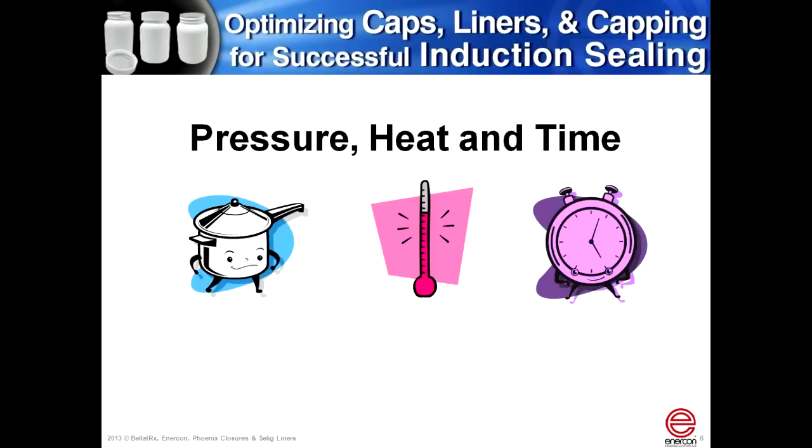First piece we're going to talk about is one of the critical components to understand, and that is the theory of pressure, heat, and time. Any sealing process that you undertake in your operation is going to require those three elements. So let's dive into each of them a bit deeper.

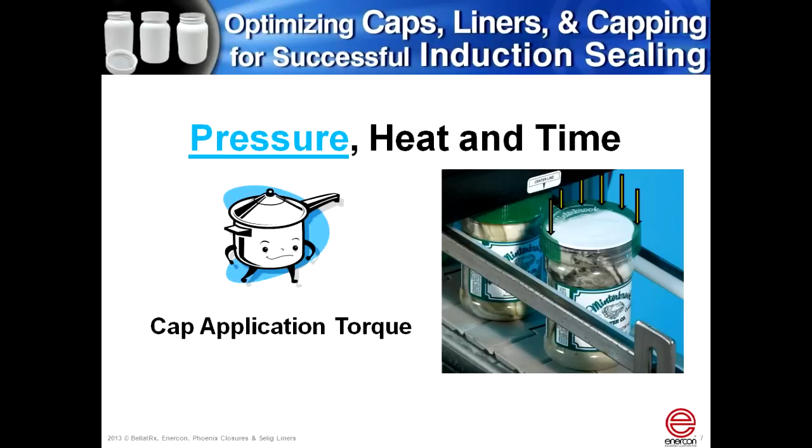Pressure in the induction cap sealing process is very critical. The pressure that is applied from the cap to the lining material, which puts it in intimate contact with the bottle, is provided by cap application torque. We're going to talk a lot about cap application torque throughout the webinar today, so keep this piece in mind as we go through.

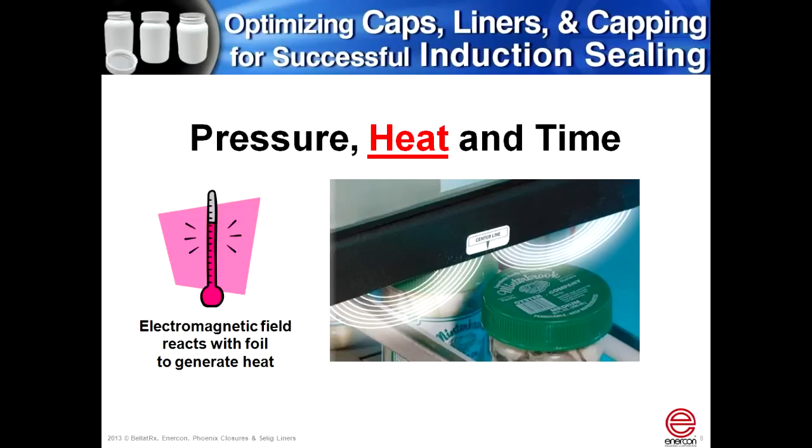The heat component in the induction sealing process is generated by the induction sealer itself. The picture on the screen here illustrates the magnetic field that's created by the induction sealer. You'll see the little white arcs coming from the center towards the sides of the sealing head in this picture. That indicates how that field generates throughout the width of the coil. This happens to be a case where it's going to be a wider application - a 63 millimeter closure - and the heat will vary based on the power level you set the machine at.

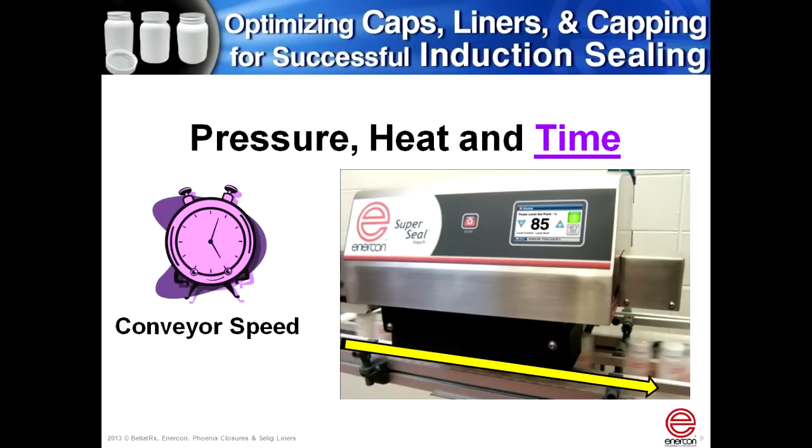The final component in pressure, heat, and time is obviously time. Time for this is not necessarily in minutes or seconds, but it is dictated by the conveyor speed, by the belt speed at which your product is running. So we'll take a look and say if you're running 50 feet per minute, we'll size the machine appropriately for 50 feet per minute, as well as knowing your cap diameter and the cap style involved.

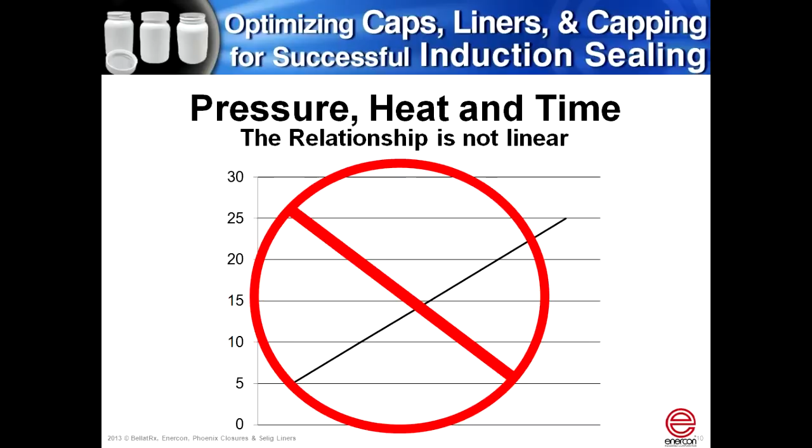As we talk about time, an important thing to remember is that the relationship between this pressure, heat, and time equation is not linear. If your product is running at, let's say, 100 feet per minute, and you decide to increase that by 10% to 110 feet per minute, you've got to keep in mind that the relationship between the power level needed on the machine is not necessarily linear. There are cases when it does happen, but it's always important to run and qualify your operating window, which Jeff from Enercon will get to a little bit later in the presentation.

So let's talk about a few variables in the induction sealing process, the first of which is air gap. When we talk about air gap, we're referring to the distance the foil is from the sealing head, or the top of the closure from the bottom of the sealing head. This is important to be consistent. The gap can be 1/8 of an inch, which is something we often recommend. Sometimes it's 1/4 of an inch, completely acceptable as well. It could be 1/2 an inch, but that probably isn't going to be overly effective. You're not going to use your machine as effectively. But the most important thing with your gap is that it's consistent.

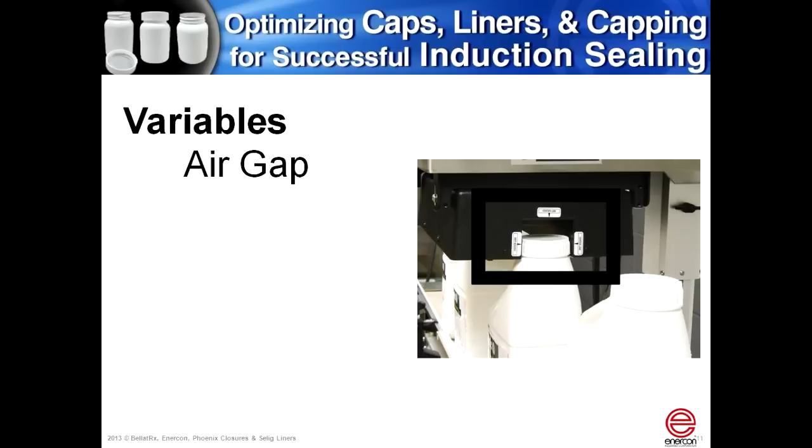We actually provide a tool with each of our systems. It's about an 18-inch ruler, 1/8 of an inch thick. You set 1 or 2 of them on top of a bottle on either end of the machine, simply lower the machine down, and that will set your air gap consistently each time. Jeff will dive into that a bit more later.

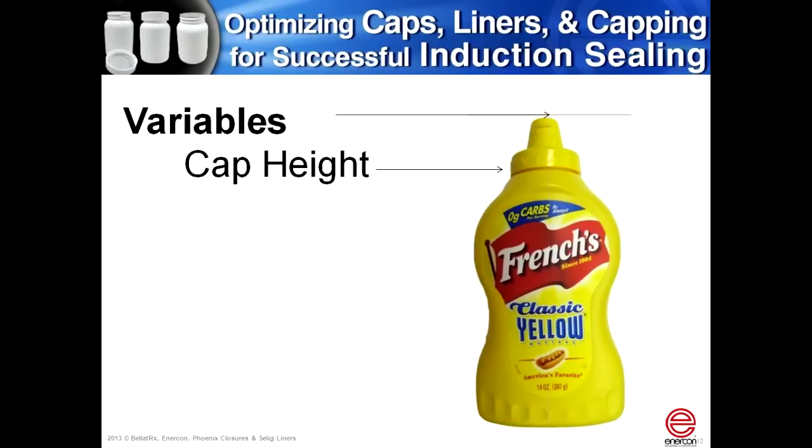I mentioned it in the pressure, heat, and time component, but application torque, I'm going to mention it again. We're going to dive into it deeper, but this is the most critical component to get right in your induction sealing process to ensure every time you're as consistent in your seal as you'd like to be.

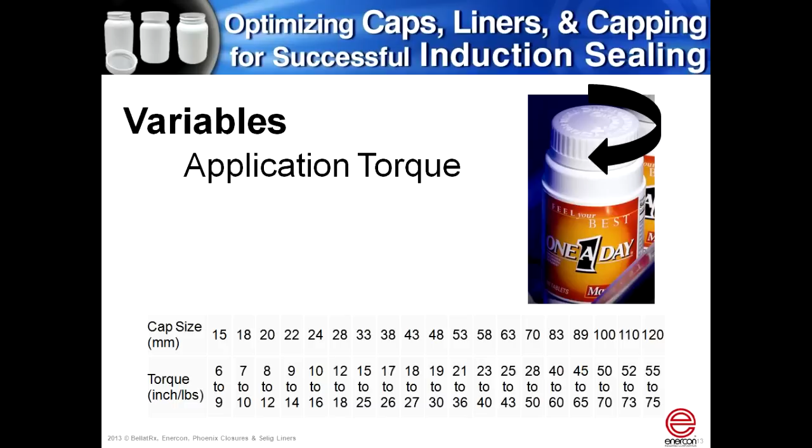The final variable that I want to talk about is material change. This can be anything from a wholesale material change, maybe that's your packaging, your bottle, going from an HDPE bottle to PET, or it could be simply changing from supplier A to supplier B. It's important to note any of those changes and make sure you run compatibility tests with the induction seal material and the bottle that you may be changing, or if you're changing cap suppliers, that the lining material stays the same so that piece does not come into effect and ultimately change your success in the induction sealing process.

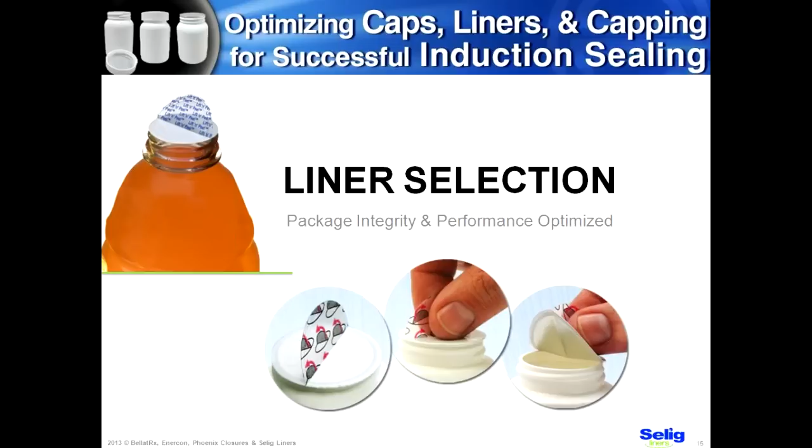Before we talk about selecting the ideal liner, we need to think about the benefits that a liner provides so you can customize your selection. The best liner for you is really the one that most efficiently meets your needs. Originally, liners were used for leak prevention, and that's still the most common use of liners, but they've also provided other benefits as well.

For instance, with induction seals, they provide consumer confidence that the product they are purchasing is safe and secure, all the way to the extreme of providing tamper evidence. Induction heat seals do meet the tamper evidence requirements for regulated products, such as analgesics and pharmaceutical products.

Liners also provide a hermetic seal, essentially zero gas transmission and zero moisture vapor transmission. What that means is it keeps the good stuff in, like fragrances or active ingredients, and it keeps the bad stuff out, especially moisture for products that need to be dry, like powdered coffees and granules. It also keeps out oxygen for those products that are oxygen sensitive.

We have several applications where the liner is actually being used as a means of anti-counterfeit. These are typically for products that are more expensive or ones that have very complex and varied distribution where it's easy for the counterfeiter to introduce their product. It's not a huge problem yet in North America. This tends to be more of an Eastern European and Latin American issue with things like pharmaceuticals and liquors. However, it's becoming a much more significant problem in North America.

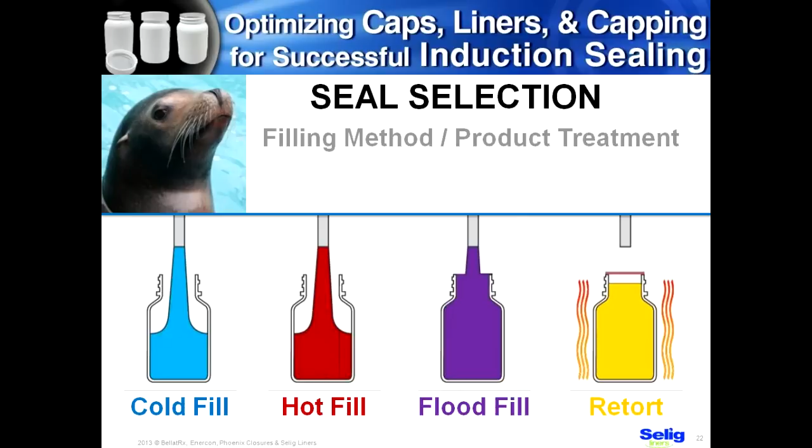The third thing to consider is the filling conditions, post-filling package treatment, or even distribution. In the case of hot fill, cold fill, and things like retort, there's a significant amount of potential energy transfer, and that needs to be considered as we go through an induction sealing process, which uses heat as a means to seal the induction liner. Also, if you have a product that's being filled at a low altitude and distributed to a high altitude, or vice versa, you need to consider that to make sure you have the right mechanical structure in your liner.

The fourth step is looking at your seal and whether it requires tamper evidence or not. Clean peel is more typical. However, if your product requires tamper evidence, or you want tamper evidence, that needs to be considered up front. Basically, in a tamper evident liner, the bond is stronger than the structural integrity of the liner itself, and that's how a tamper-evident liner is created.

The fifth step is looking at your reseal integrity. After the foil has been removed by the consumer, does the package still need to have a superior seal or reseal against usually things like oxygen or moisture? This is accomplished through what we call a two-piece liner.

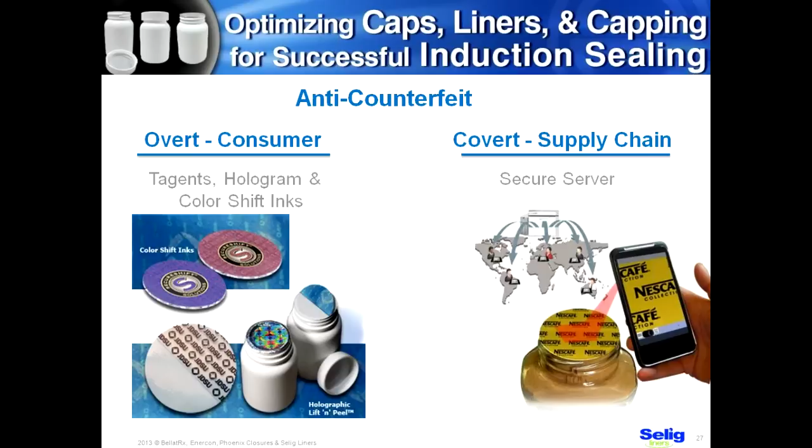Lastly, the brand owner has an opportunity here. The liner itself is potentially a large piece of real estate, a blank canvas. This is the last contact the consumer has before enjoying that product, so it's an excellent opportunity to promote your brand through couponing. We've done instructions, we've even done 2D barcodes that allow your consumer to go directly to your website for more information. So in the end, what's the best seal?

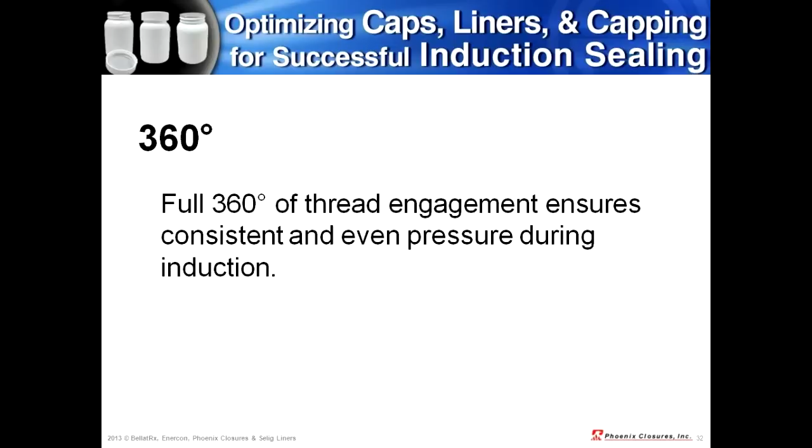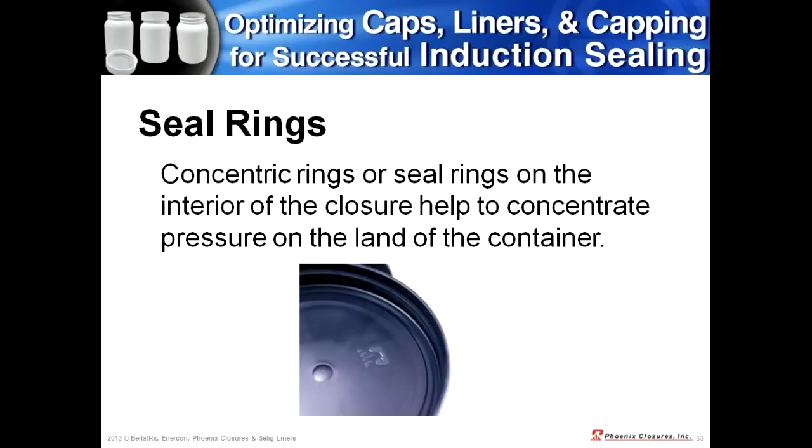Another way to enhance the pressure portion of a successful seal is to concentrate that torque and pressure on the land area of the container. In closures, you'll typically see, as in this picture, a series of seal rings. These seal rings are designed to concentrate that pressure right on the land area of the container, effectively enhancing the pressure and providing an effective seal.

It's also important to understand that liners are retained in the cap and delivered to the package before induction sealing. So the process begins with a roll or web of liner material that is punched into a specific shape and size, chosen and determined based on the particular closure in use.

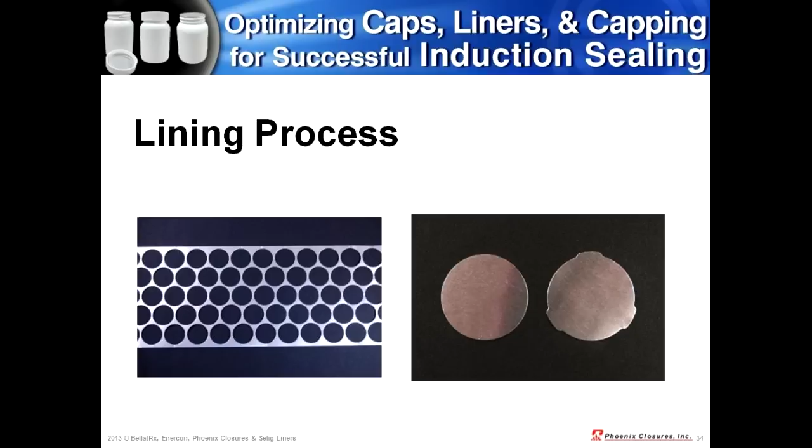That leads me to how we retain the liner inside of the closure. There's a number of different ways to do that. Typically liners are retained in one of three different ways: one is with an adhesive or glue, another is to friction fit the liner into a specifically designed retention well in the closure, and the third is to friction fit that liner into the cap using retention beads and tabs on the liner itself.

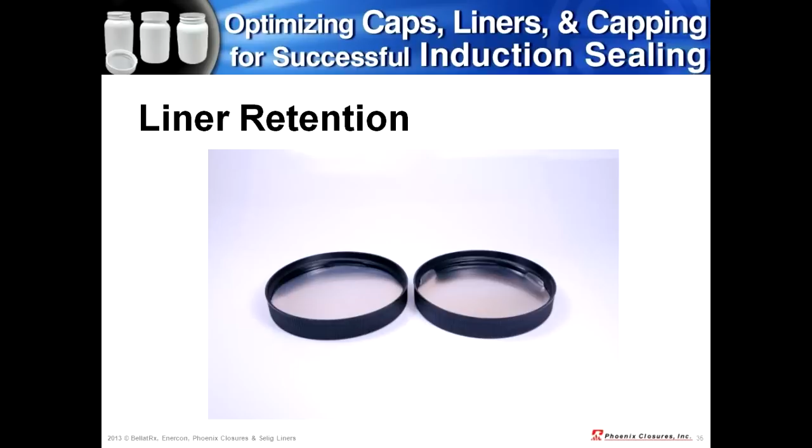Storage conditions can have a huge impact on liner capabilities long term. It's important for everyone to use FIFO as they rotate inventory, but certain liners are susceptible to certain environmental conditions. Two-piece liners, such as John was talking about, held together with a wax bond, are very susceptible to heat, so keeping those in a controlled environment is critical. That temperature should be between 60 and 86 degrees Fahrenheit.

Two years ago, we had a complaint come out of the field for failures of a wax-bonded liner. The customer was certain they were keeping their inventory in an air-conditioned, environmentally controlled warehouse and couldn't understand how there could be heat. As we investigated, we found some of their caps were stored right next to where they kept their forklifts. Propane-fired forklifts were idling within literally inches of where they stored their caps, and as a result, they were causing heat problems in that wax layer.

Other storage problems can be particularly noticeable with paper or pulp-backed liner materials that are susceptible to humidity. The recommended humidity levels in your warehouse should be between 40 and 60%. Anything above that, liners may begin to curl, and if they curl far enough, they can come out of the closure.

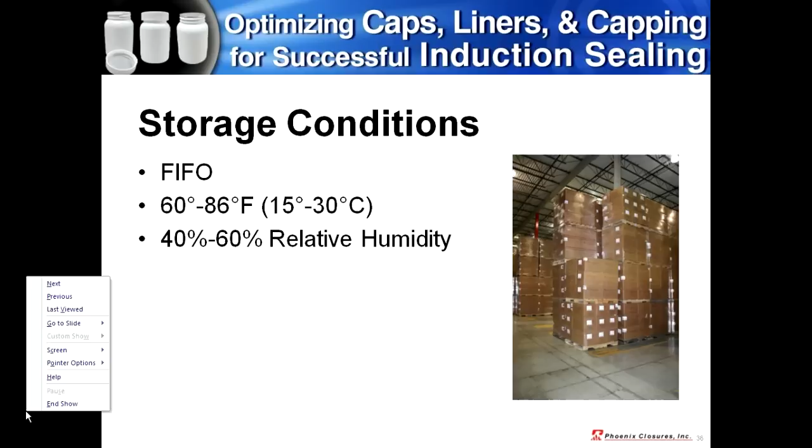The last thing I wanted to touch on is the concept of putting together a consistent package, especially if it's designed for consumer convenience. You've done a great job coming up with a bottle design that's easy for the consumer to grip. You've chosen a closure that's easy to remove, with knurling designs or an easy grip feature.

The last thing you want to do is put in a liner or induction seal that requires the consumer to break through it with a household implement. You don't want to put a weld seal onto a package you've worked hard to make easy to get into.

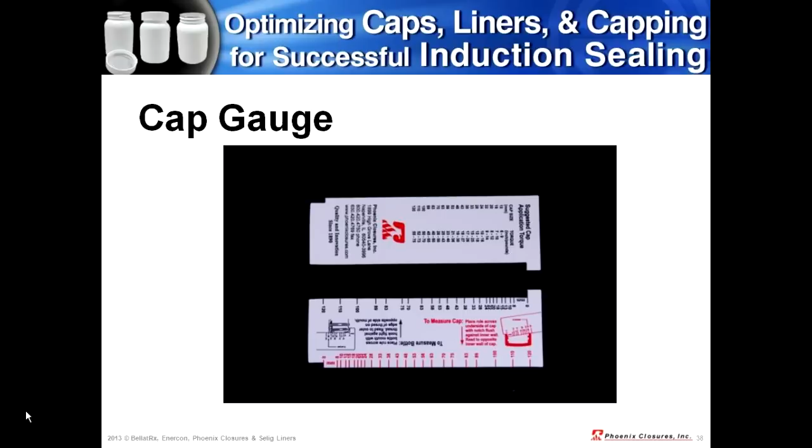Thank you, Tim. Over this next section, I'd like to talk to you about how to optimize your capping process for successful induction seal. In a basic format, let's talk about the capping process, and the next slide will discuss the process of capping.

First, there is the sorting of the bottles and caps. The caps are typically sorted with a vibratory bowl, a centrifugal bowl, or sometimes a cleated elevator, while the bottles come into the capping machine or the capping system using a conveyor, a star wheel, a feed screw, or sometimes side belts.

The cap placement is where the cap meets the bottle, and this is a critical part of the capping process, which we will discuss a little bit later. Cap inspection, if available, gives a lot of great value to your capping process. Cap torque is where you achieve the required torque, and if available, cap torque verification gives you the security that you are achieving the right torque.

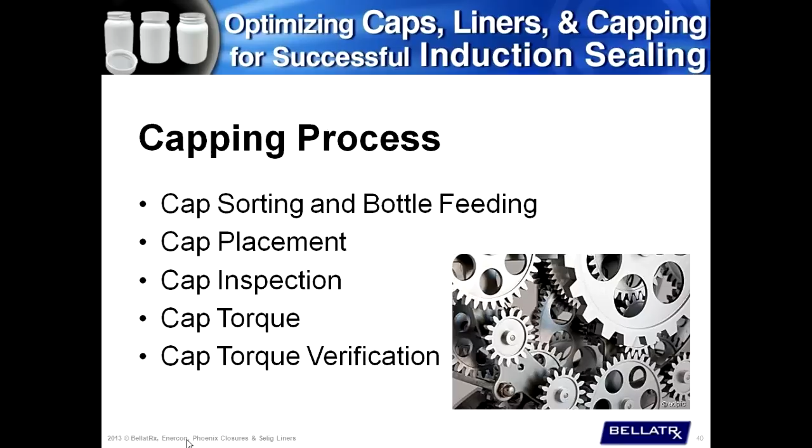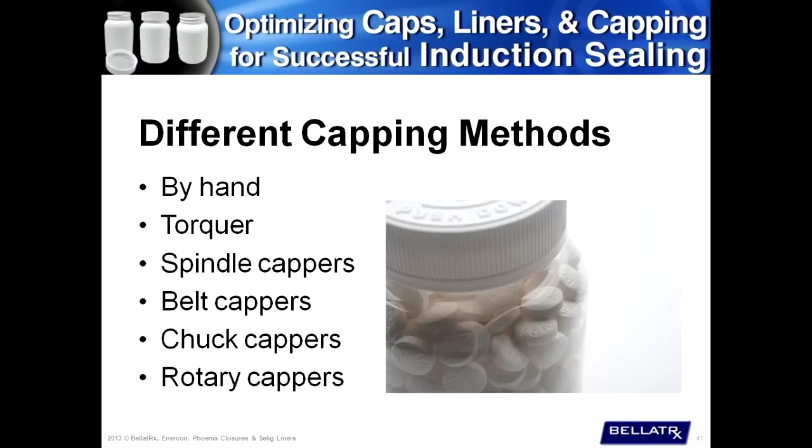The next section, we'll talk about different capping methods. Capping could be done by hand, using a single station torquer, using spindle cappers or belt cappers. There's also chuck capping and rotary capping. Over the next couple of slides, we will talk about them in a little bit more detail.

In the most basic format, hand capping is where the operator places the caps and torques them onto the bottles. Although there's no capital investment in this scenario, there's a recurring cost of the operator being there. There's a risk of injury due to repetitive motion, and the torques that are applied are rarely consistent, which may cause problems for induction sealing later on.

This process cannot be validated in industries that require validation, and the speeds are fairly limited, maybe 10 to 20 bottles a minute with a good operator.

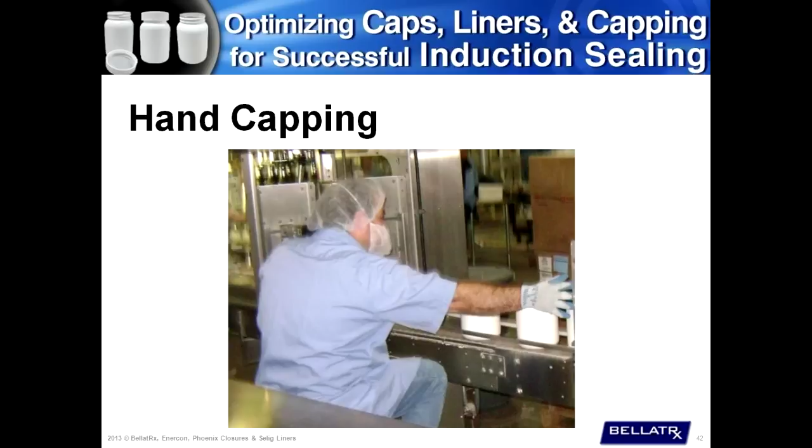The next capping method is using a torquer, and by torquer, I mean a single station, either on a conveyor or with a handheld device. The operator places the caps by hand onto the neck of the bottle, and the torquer would apply the torque.

Now, the operator is still required, and therefore there is a recurring cost going forward. It's a lower capital investment. There's still a risk of injury due to the fact that the operator would have to continue to apply the caps manually. The placement of the cap is typically inconsistent, and without any further verification or inspection afterwards, this process also cannot be validated, cannot be repeatable. Also the speeds are fairly limited, 20 to 30 bottles a minute.

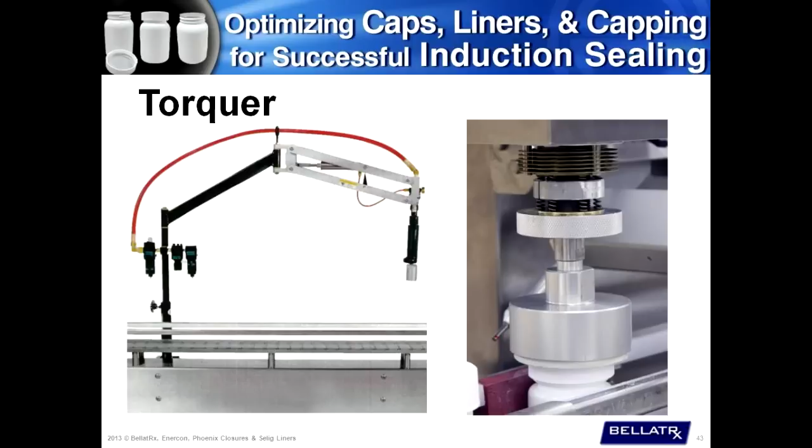Spindle capping is the next level of capping. Here, the spindles or discs make contact with a cap, and they spin the cap onto the neck of the bottle. This is a less expensive capper, and the bottles do not stop. The belts grab the bottle as they come into the system, and they guide them through in a continuous motion through the capping process.

Now, due to the point-to-point contact of the different spindles or discs with the cap, the torques sometimes would be inconsistent because there's not a lot of grab between the spindle and the cap. There's also a high rate of cross-threading, 10 to 15%, and that is due to the fact that the caps are typically picked up on the fly as the bottle is coming through. The neck of the bottle makes contact with a cap that is positioned on an angle. The cap is typically not rotating at that stage and causing a high level of cross-threads.

Spacing of bottles is required because you cannot put too many bottles through the system. Also, the speeds of this machine can be quite high, in terms of 200 bottles a minute or so.

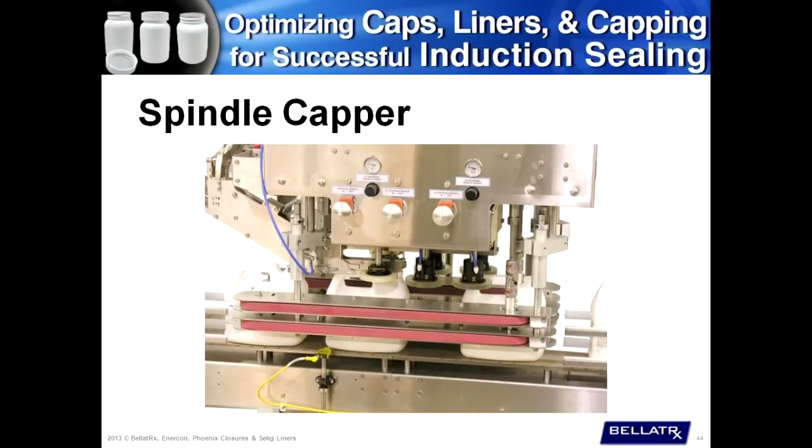Next, we'll talk about the belt capper, which is very similar to the spindle capper. However, it's belts that make contact with the cap instead of spindles. Although it's slightly more expensive, it offers benefits. The benefits are that the belts can form around the cap, making more contact and therefore better torque control. Nonetheless, there is still a high rate of cross-threads due to the fact that the same mechanism of cap pickup is utilized in most cases.

Speeds could be high. However, it is limited to one cap at a time, making contact with the belt to be able to control your torque properly. Therefore, it could be slower than a spindle capper.

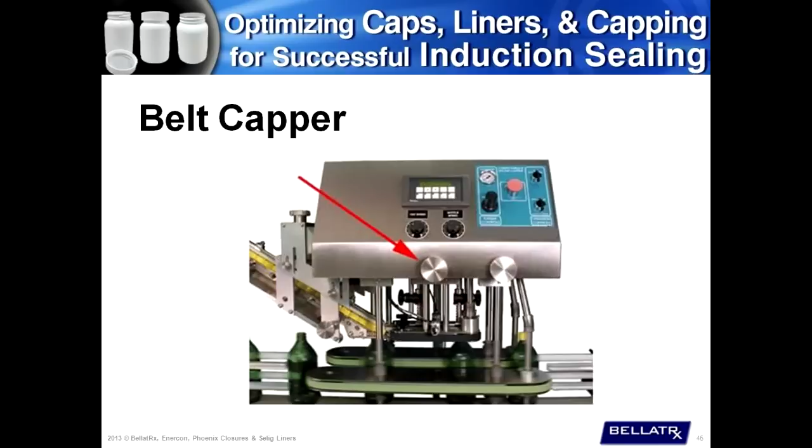The next capper is an intermittent capper that we'll look at, and that is a chuck capper. Here, the cap rotation and application is perpendicular to the neck of the bottle. Although there are change parts required, typically they're not expensive. The torques are very consistent because only one chuck makes contact with a cap, and therefore we are able to achieve the desired torque consistently.

One point to mention with chuck cappers is that the application of the cap is perpendicular to the neck of the bottle. The cap is typically spinning and synchronized, the rotation of it is synchronized with the threads so that the cap actually floats onto the threads as opposed to being slammed on. This would allow us to reduce the level of cross-thread down to 0.5% or 1%.

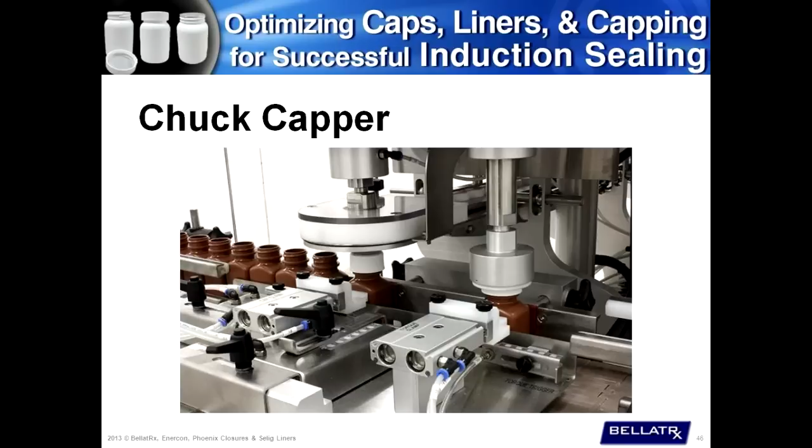Mind you, the speeds on the chuck capper, since it's an intermittent motion machine, are limited. It could range from 60 to 120 bottles per minute. And finally, the rotary cappers offer continuous motion.

There's typically multiple heads, four or more, which come in contact with the cap and bottle. It's relatively more expensive than the other capper models we've talked about and requires change parts. However, the high-speed capabilities of a rotary capper make it fit for specific applications. Again, the torque application is perpendicular to the neck of the bottle, so we're handling one cap at a time, which allows us to be precise with the torque application.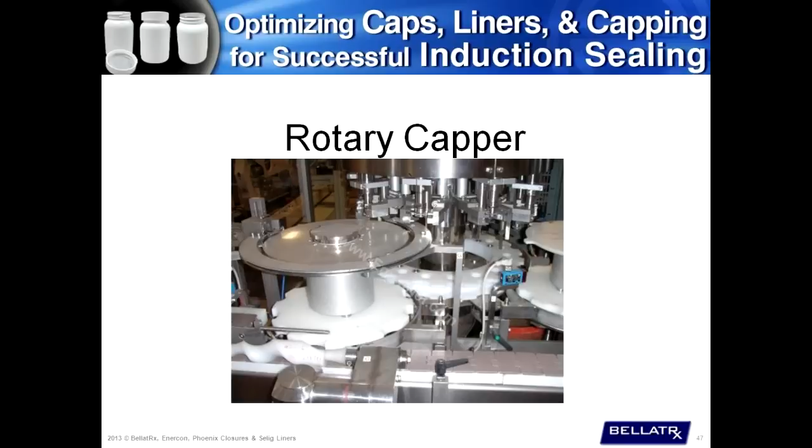Over the next few slides, I'd like to talk about some capping considerations. The cap placement station is probably one of the more critical components of capping, and that's where cross threads happen if not handled correctly.

There are certain types of caps, like embossed lettering caps, Yorker caps, snap caps, or caps with tabs or flip tops, that require certain types of cappers, where chuck cappers and rotary cappers may be better suited solutions as opposed to spindle and belt cappers, which will interfere with the tabs and the cap pickup.

Now, I talked about it before, but I want to elaborate a little more on the angle pickup of a cap. When the neck of the bottle comes through and picks up the cap on an angle, typically the cap is not rotating, and a device pushes the cap onto the threads, and then the cap starts spinning. That is the case with belt cappers and spindle cappers. That's often done due to speed constraints, trying to achieve higher speeds.

However, the cost is higher cross threads. In chuck cappers and rotary cappers, since the rotation of the cap application motor and the down speed are synchronized in a way to allow the cap to float onto the threads, this limits the number of cross threads.

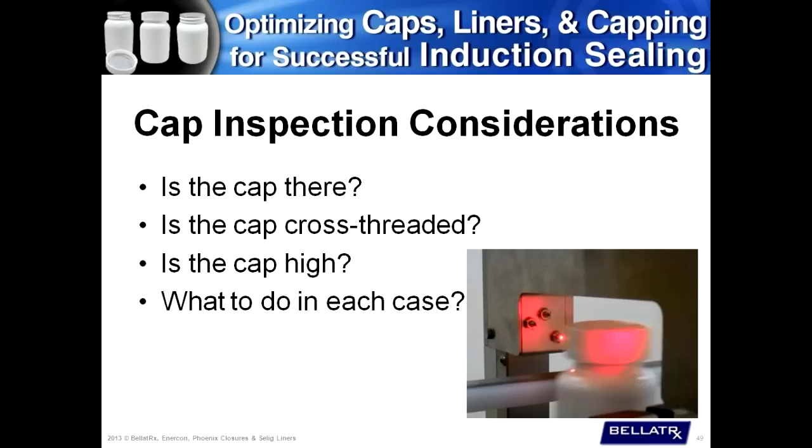In previous sections, we discussed the application and removal torque, and the next slide will talk about these torque considerations. The application torque is what the capper applies onto the cap, and the removal torque is what you're able to test with the torque tester that was mentioned previously.

One point I want to bring up here is immediate removal torque. It's important to note that when testing for removal torque, you need to set a time factor for how long after you pull the cap offline you need to measure the removal torque. The longer you wait, the more relaxation will take place in the liner and cap, and therefore the torque values might be different.

There are three ways to apply and control torque onto the cap: using mechanical clutches, magnetic or pneumatic clutches, and servo motors. The mechanical clutch wears over time and needs constant adjustment, and also requires some trial and error to achieve the torque you're looking for.

Magnetic clutch does not wear over time. However, it still requires the trial and error scenario. The servo torque motor offers superior torque control capabilities, which we'll look at in the next slide.

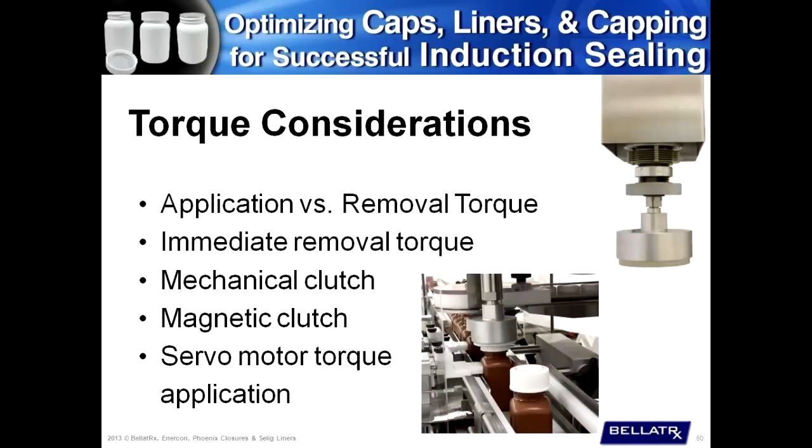What's important to note here is that it provides immediate output, meaning when you're using a servo torque motor, it provides immediate torque output. What I mean is that when you set the torque value you want applied onto the cap, the first cap out of the system will be at that torque, so there's no trial and error in this scenario. It also gives you diagnostic capabilities, such as low torque inspection.

The ability to monitor this type of chart in the background allows you to eliminate the initial impact of the chuck with a cap, preventing erroneous torque readings. It allows you to control the downforce, and very little downforce is required if you have the right solution. Also, if there is any slippage between the chuck, the neck, the capper, or the gripper, it allows you to reject bottles that did not achieve the required torque.

Furthermore, torque readings and monitoring and logging the torques allows you the capability to review your batch records over time. And with this, it highlights the importance of applying consistent and repeatable torque for induction sealing.

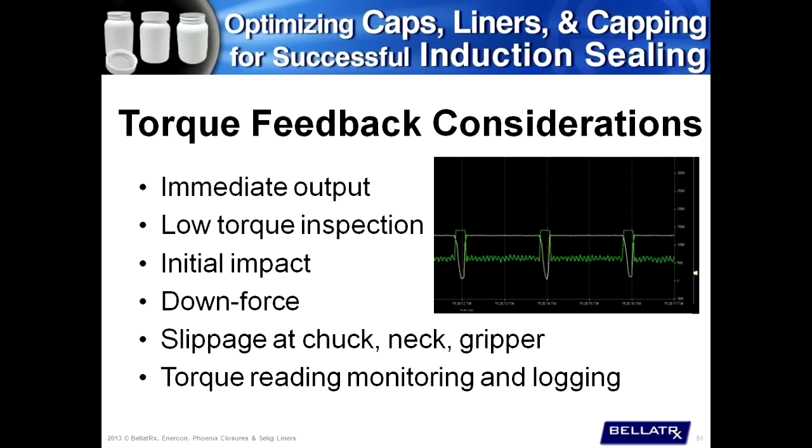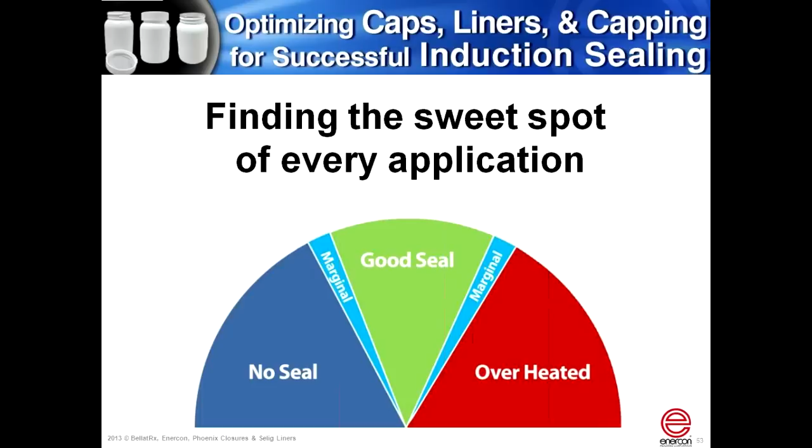Now that we know all about the liners, the caps, and the cappers, it's time for the rubber to really hit the road and actually create a seal. Keep in mind that every application is a little different and has its own challenges. You need to understand how and why you get the best seal. We're going to summarize the steps to help you determine where your sweet spot should be to ensure you get a good seal every time. A more detailed explanation of this summary can be found on our website if you need it.

There are 5 basic steps when determining your sealing window. First, make sure your system is set up properly. Next, check all of your variables, many of which have already been covered. Third, find the lowest output where you can get a good seal - that's your minimum. Next, find your maximum where you can get a good seal. Together, these two points define what we refer to as your sealing window. Lastly, select your production output setting and record your data for future reference.

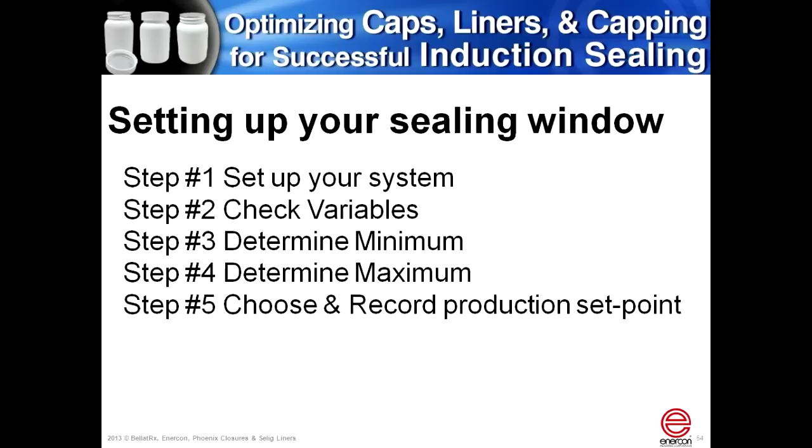Okay, first you have to make sure your sealing head is aligned properly. If not, you just won't get even seals. Your bottles have to travel down the center of the sealing head. We provide stickers on all of our sealing heads to aid in this process. You may find that you need guide rails under the sealing head to ensure proper travel.

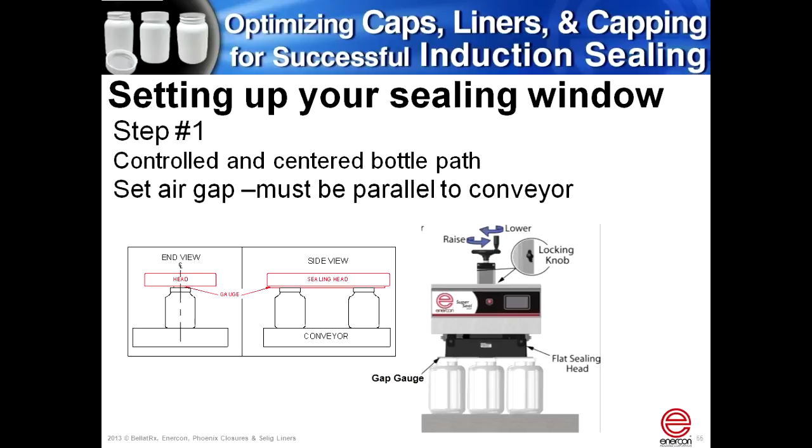Next, you need to set the air gap, which Ryan referred to earlier. He also mentioned that we provide a gap gauge with every system to help with this process. Make sure you've got an even air gap all the way across the coil, and we recommend a 1/8 inch gap. As Ryan said, consistency is very important.

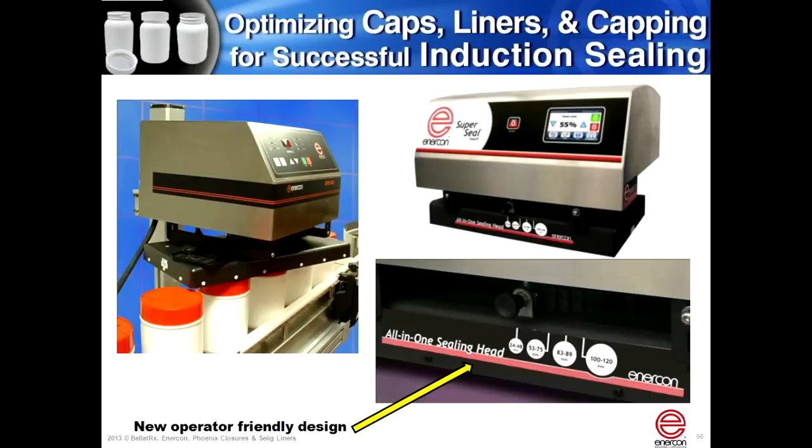Now that you've set up your sealer properly, you need to check and be aware of all the other variables that can contribute to seal quality. Many of these have already been covered, so I'll only touch on them briefly. First, make sure you run any tests at your production conveyor speed. Next, ensure your liner and container are compatible for a good seal. Ensure your container and caps are free from defects, and verify that your application torque is within acceptable ranges.

Once you've taken care of all of these things, you're ready to run some containers and find where your sealing window lies. We recommend that you start at a low power setting and work your way up until you just start to get an acceptable seal. This is what you can consider your minimum set point for your sealing window.

From there, slowly increase the output until you just start to see unacceptable signs of scorching. When you see that, you realize you've gone a little too far, so you back up until you see a good seal again. This is considered the maximum set point of your sealing window.

Now you've determined where you can get a good seal, but you'll have to choose where within that sealing window you'd like to set your sealer for production.

Hey Jeff, this raises a question. As you're talking about this, in the last example we showed some numbers, and it looked like a minimum set point of 55 and a maximum of 75, which would show a pretty big window. Are all applications that wide of a window? That's a good question, Ryan. No, they're not all that large of a window - 20% as shown on those slides was just an example. Some applications will have a wide window like that, while others, depending on many different scenarios, can have a smaller sealing window of maybe only 5% from minimum to maximum. But each one is different, so you have to run these tests to find out for yourself.

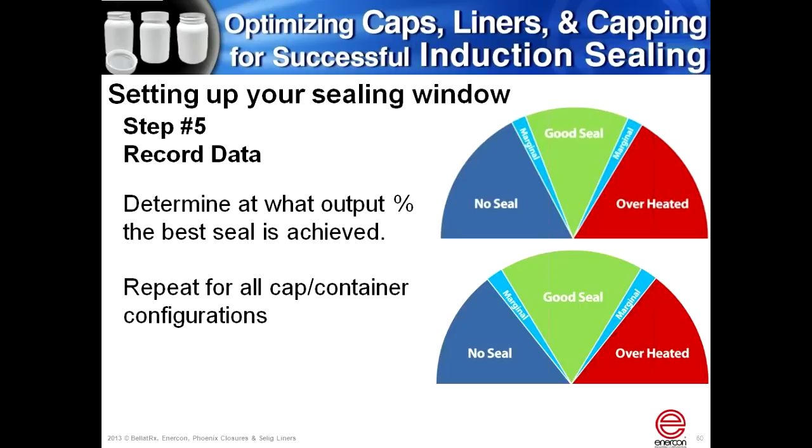Once you've got your sealing window set, you need to find your location within it. Some people like to put their production level right in the center of the sealing window and consider that the safest spot. But perhaps in your application, you're not too concerned about a little bit of scorching, and you'd rather be on the higher end of your sealing window, because you'd rather have a little overheating as opposed to a weaker seal. This will allow you to compensate for variables such as bottle height tolerances and variations in torque application.

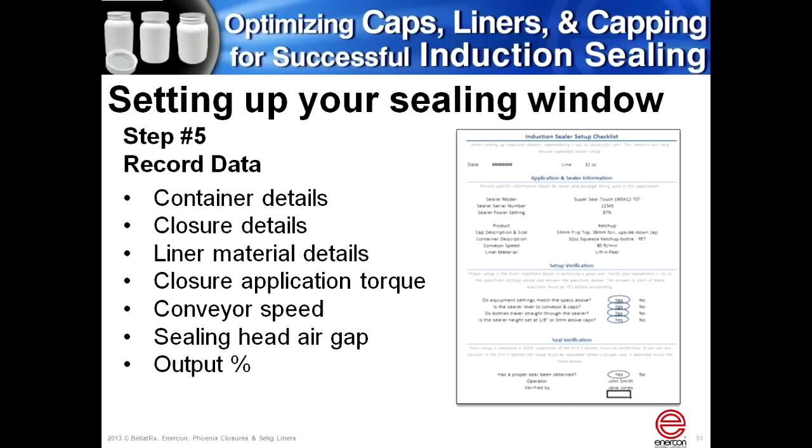Whatever set point you choose, you should now record all of your important information for future reference. Enercon can provide you with a checklist of sorts, as well as a good spot to record any other data. If you have one of our Super Seal Touches or a new Super Seal Max, these units have provisions to store some of this information on board the sealer, making things much simpler for you and your operator.

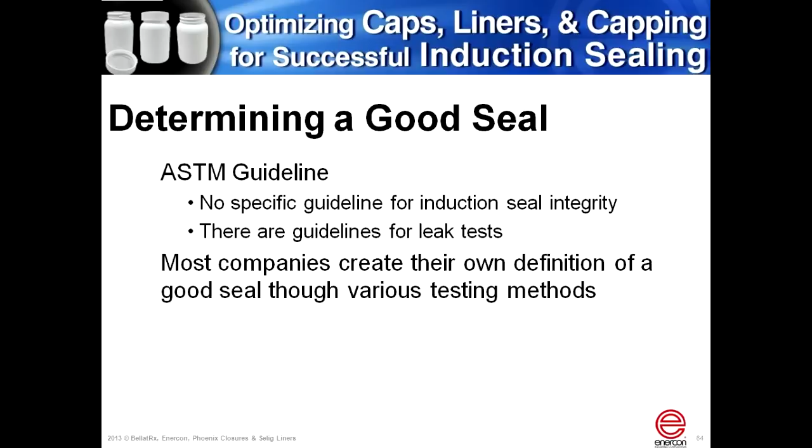With all of this, of course, we assume that you're familiar with what you need to look for in determining whether you have a good seal. Keep in mind that there are no ASTM guidelines for determining a good seal. Typically, each company will set their own standards that they need to meet to consider a seal good. These will vary with every application. Here are some things to look for in a good seal.

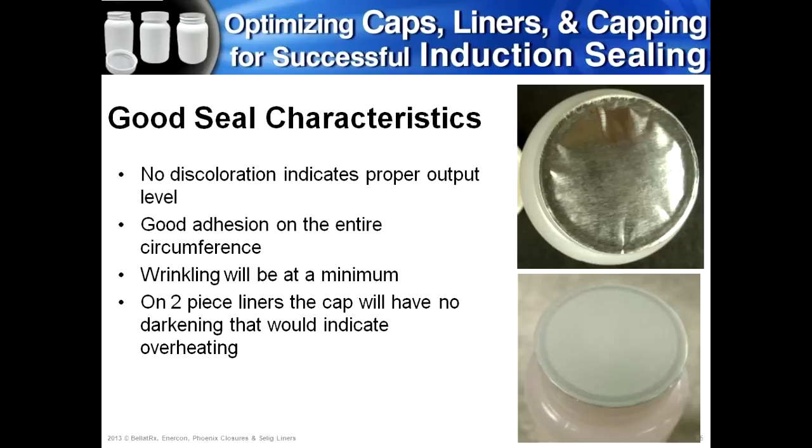Usually you can use a simple visual inspection. A good seal will have no discoloration on the seal or any backing material. There will be good adhesion all the way around the land area, which you determine when you peel the liner off. There will be little or no wrinkling of the liner. A two-piece liner gives another piece of evidence — you can check the backing material that's left in the cap. Any discoloration here would also indicate overheating.

Beyond visual inspection, there are many other ways to check for a good seal, and your company will want to decide what is best for them. There are both wet and dry vacuum chambers that you can employ to check for leaks. Take into consideration how your product will be shipped. Some companies have actually shipped a test run of their product to a certain location and evaluated the seals after they reached their destination. There are also inspection systems on the market that will test for leaks — these usually involve applying mechanical pressure to the container.

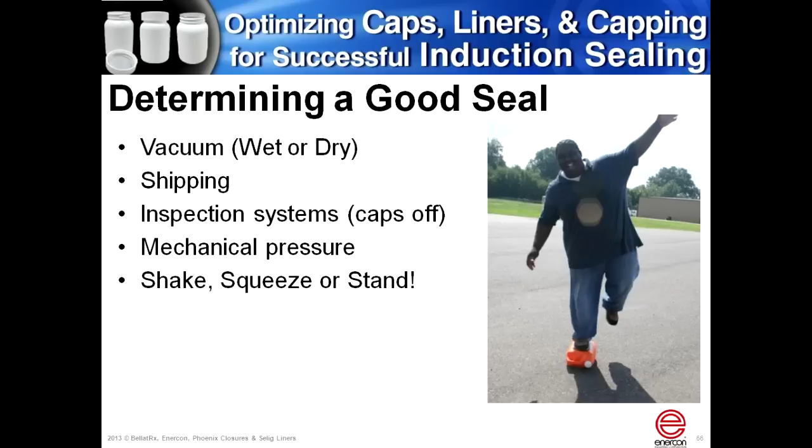Lastly, you can be like this guy and shake, squeeze, or stand on your container. I'd say that's a pretty good seal in that container.

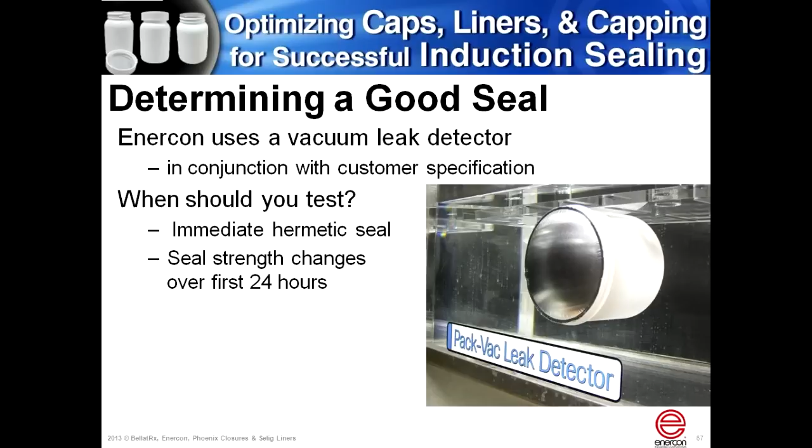At Enercon, we've got a submerged vacuum chamber for testing for leaks. We work with customers in conjunction with their specs to determine if their seal is up to their standards. Keep in mind that some liners will continue to set up for up to 24 hours — contact your liner manufacturer for this type of information. I learned this the hard way on my very first startup over 15 years ago, where the customer was checking the seal immediately after sealing. But as long as you're aware of all your variables, this really shouldn't happen to you.